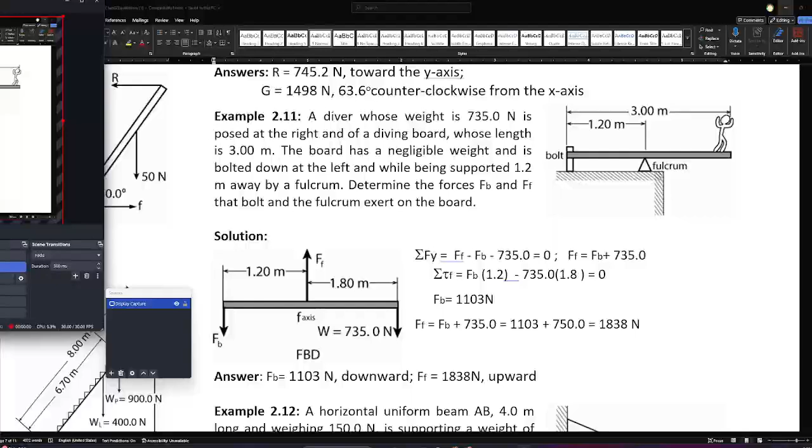A diver whose weight is 735 Newton is poised at the right of a diving board whose length is 3 meters. The board has negligible weight, meaning we don't consider the weight of the board. It is bolted down at the left while being supported 1.2 meters away by a fulcrum. Determine the force FB.

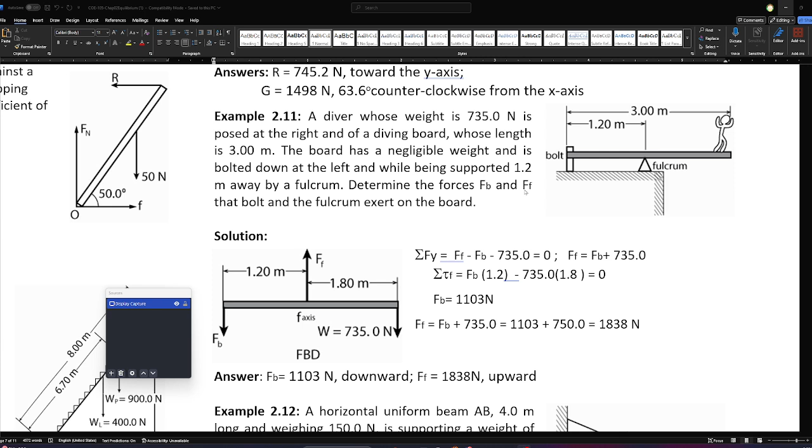This is the force exerted by the bolt. And FF here is not frictional force, but the force of the fulcrum, that the bolt and the fulcrum exert on the board. Let's try solving it in my own way, not the way of the module. Let's try my explanation, obviously.

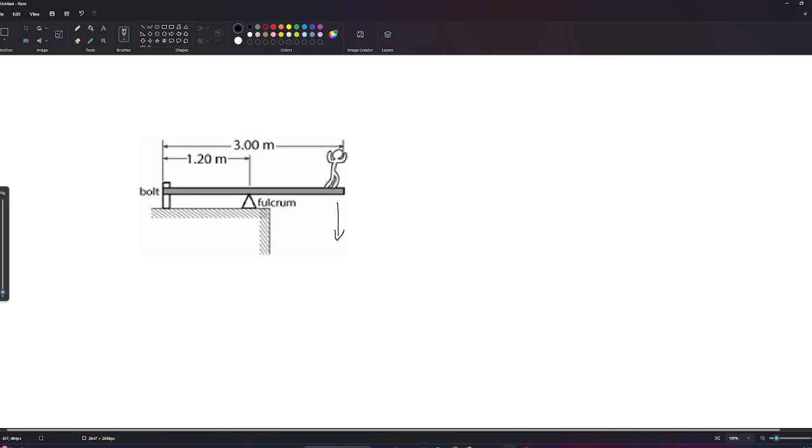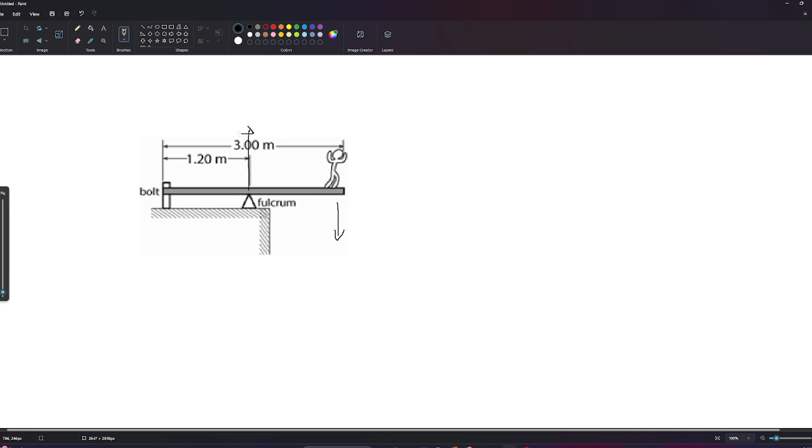The fulcrum now is responsible for the normal force, in which the normal force is the force of the fulcrum. Then the bolt, of course, also carries weight. Let's say this is FB. Now we have two unknowns, FB and FF.

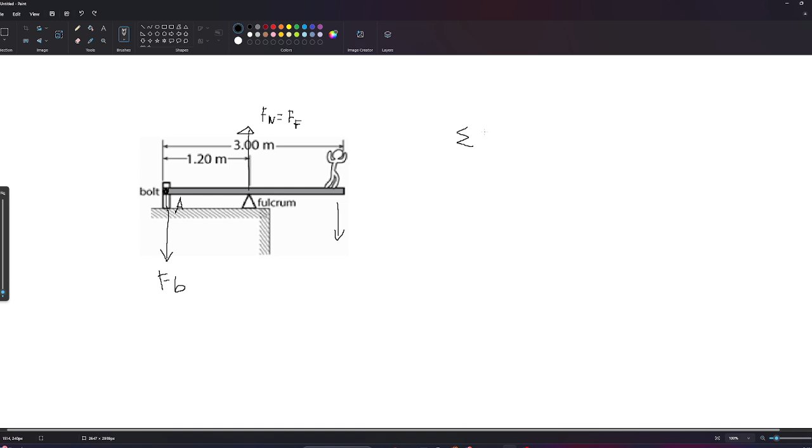So obviously, like last time, I'm telling you, if you are to find the pivot point, if we pivot at least at one unknown, we can get rid of that unknown so it cancels out. What am I saying? Let's say this point is point A. So the summation of torque

Pardon me for using the mouse, my handwriting is still the same, really ugly. So this torque, the tricky torque, therefore, 0 is equal to F1 times distance 1 plus F2 times distance 2 and so on and so forth, Fn and distance n. Meaning, whether there are 10 million or just 5 active forces, you add them all, the summation of torque at a point equals 0.

Let's try it. 0 is equal to FB multiplied by 0. Why 0? Because at point A, the distance of FB is 0. So therefore, whatever force FB applies, even 1,000,000 Newton, if we multiply it by 0, the result will be 0. So its torque here is 0.

Plus F2 here. What will our F2 be? This is the force of the fulcrum, FF times distance 2. This distance is from this point up until this point, let's say this is in red. This point up to this point. The distance of that, obviously, is 1.2 meters. We'll have here 1.2 meters.

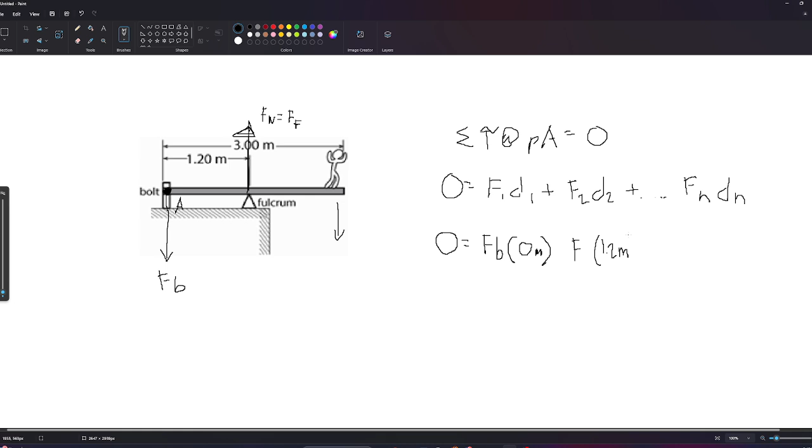But wait, what is its sign? Is it positive or negative? If we notice, if I were to pivot here at the bolt, point A, following this value, this is the 1.2 meters. If I follow the force due to the fulcrum, what will be the rotation? That will be counterclockwise. When counterclockwise, that is positive. Right? So therefore, we will have here a positive value for F. Okay, hopefully that's clear.

Next, we have the force applied by the diver. Plus F3, was the weight of the person given? That is 735 Newton. So we will have here 735 Newton multiplied by the distance. What is the distance from the bolt? From this point up to this one, that is 3 meters, as stated. So therefore, it is 3 meters.

But wait, what is its sign? Positive or negative? Let's follow it. This is the 3 meters. Following it, we see clockwise rotation. So therefore, that is negative, meaning this should be negative in value. Okay, so we will have here, FB cancels out.

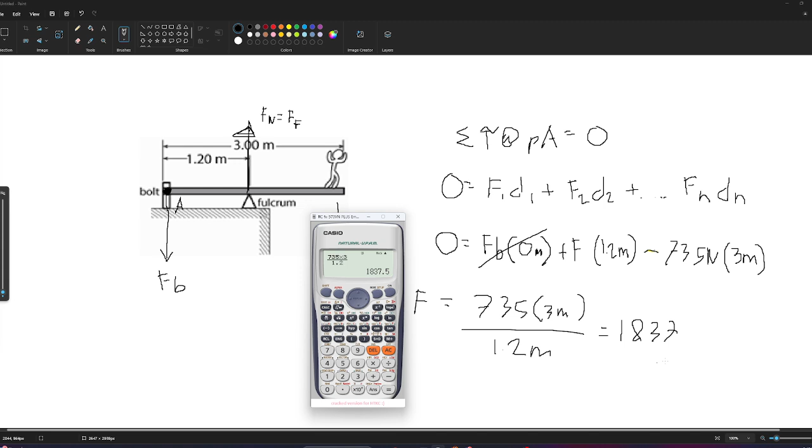If you want an emulator like this, it's free on YouTube, just search Casio 570 emulator. Times 3 over 1.2, the result is 1837.5 Newton. So we have 1837.5 Newton.

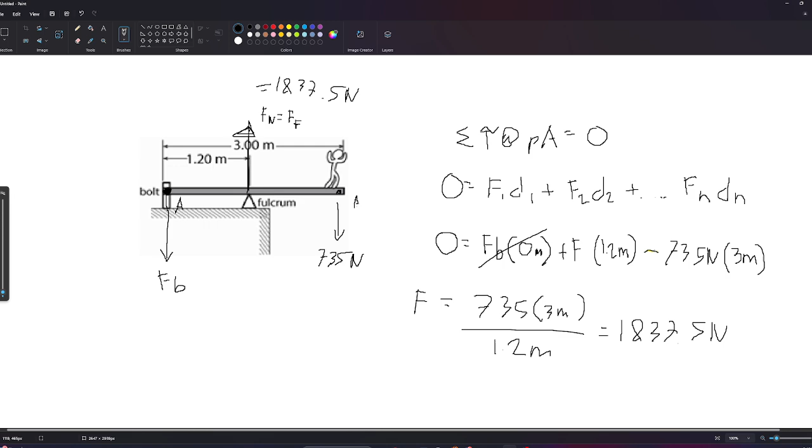Okay, next, for FB. To get FB, we can also take torque at point B. If we take torque there, we just move down here. Here I'll take torque at point B. The summation of torque at point B must again equal 0. So we will have 0 equals this 735... the 0 cancels out. So this is what I'll consider next.

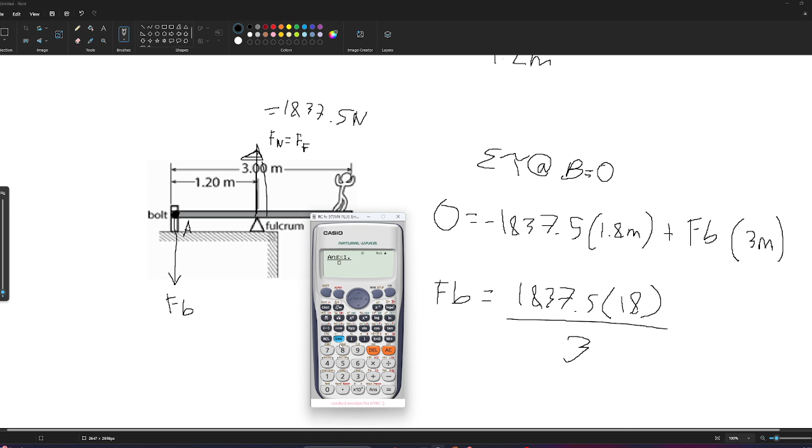So, therefore, magkakaroon tayo ng FB is equals to 1837.5 multiplied by 1.8 divide by 3. So, that is 1837, ito yung kanina, times 1.8 divide by 3. So, therefore, we'll have here 1102.5 Newton. Okay?

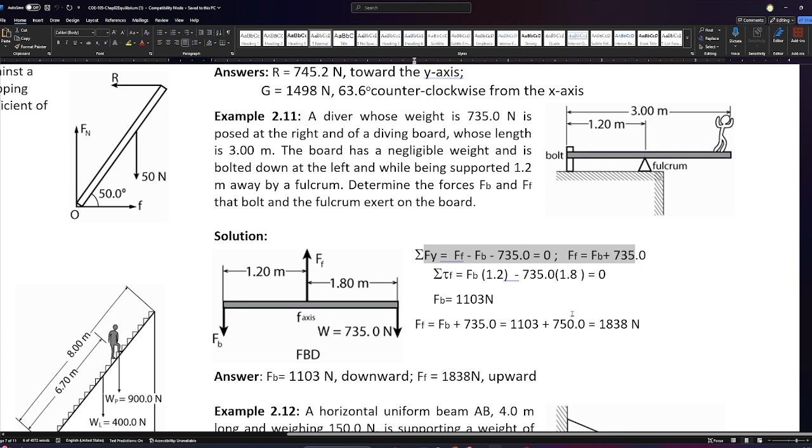A horizontal uniform beam 4 meters long and weighing 150 Newton is supporting a weight of 250 Newton as shown. So, first, what is the tension in the rod T? Ano daw yung tension dito sa rod? Yung puwersa dito sa rod na ito. Compression of the beam. Ito yung compression ng beam nandito. And the hinge reaction RH, RHX and RHY.

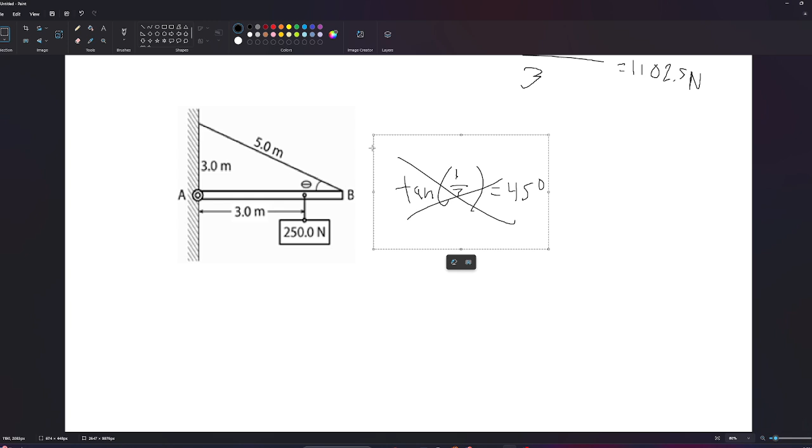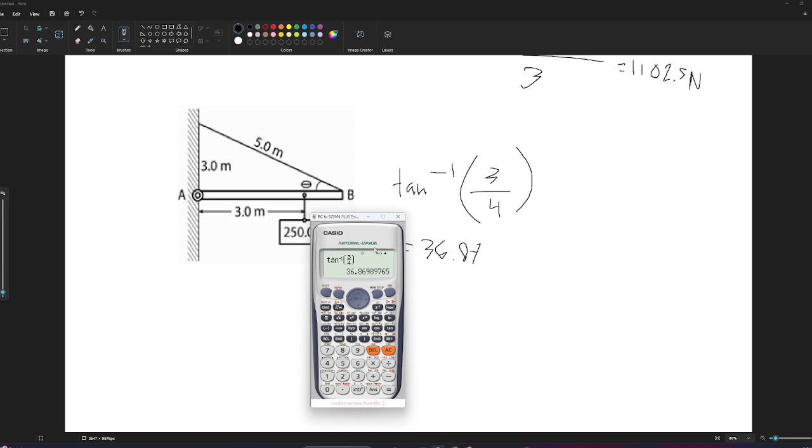So, therefore, para makuha yung angle na to, this angle, that will be inverse tangent of opposite over adjacent. Opposite na 3, adjacent na 4 meters. Ang lalabas dyan, 36.87. Kung hindi kayo naniniwala, pindutin natin sa calculator, inverse tangent of 3/4. Lalabas dyan is 36.87. So, therefore, meron tayong angle of 36.87 dito.

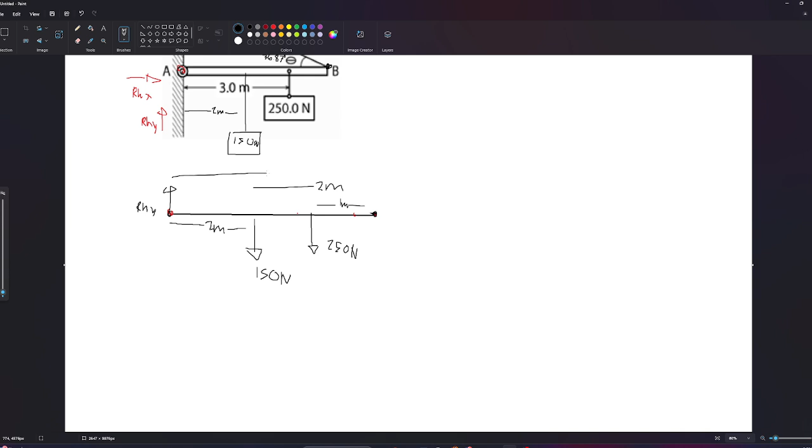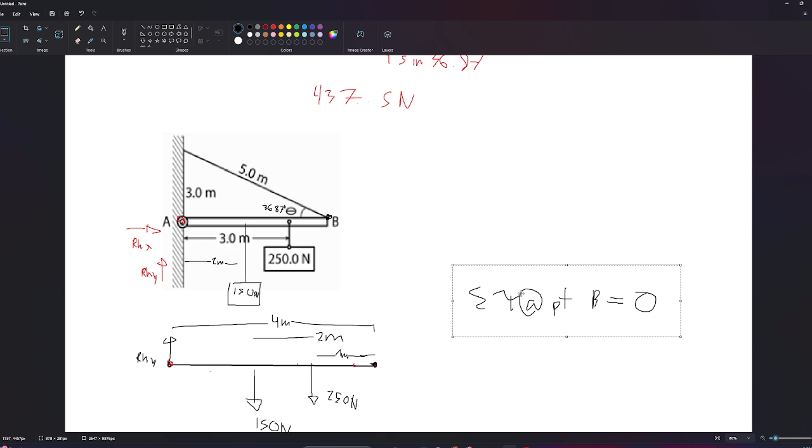Okay, the summation of torque at point B must be equal to 0. You will have here 0 is equals to 250 multiplied by 1 meter. Ang layo nito, 1 meter yan. Ano ba yung sign niya? Positive ba or negative? Paikutin. That is counterclockwise. So, therefore, positive. Next, plus 150 multiplied by 2 meters. Ano ba yung sign niya? Paikutin ulit. Sundan si 150. That is counterclockwise pa rin. That is positive, mga idol.

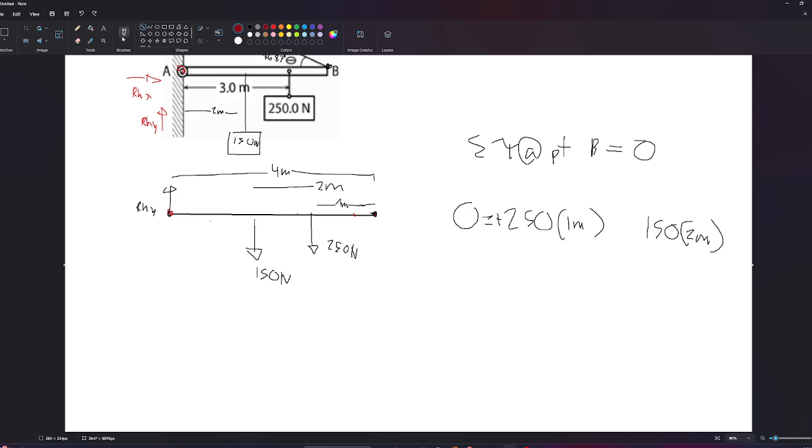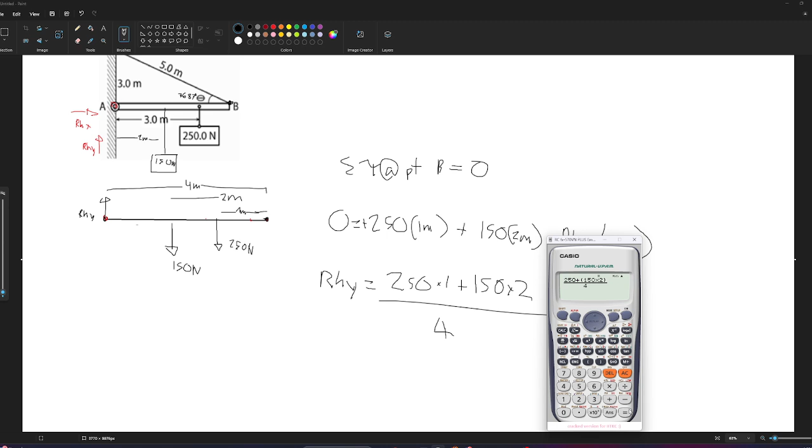Lastly, we have here yung RHY. From this point, 4 meters. Pag pinaikot ko, that is clockwise. So, therefore, negative. Negative RHY multiplied by 4 meters. So, we have here RHY is equals to 250 multiplied by 1 plus 150 multiplied by 2, divided by 4. Lalabas si RHY na 137.5. Okay?

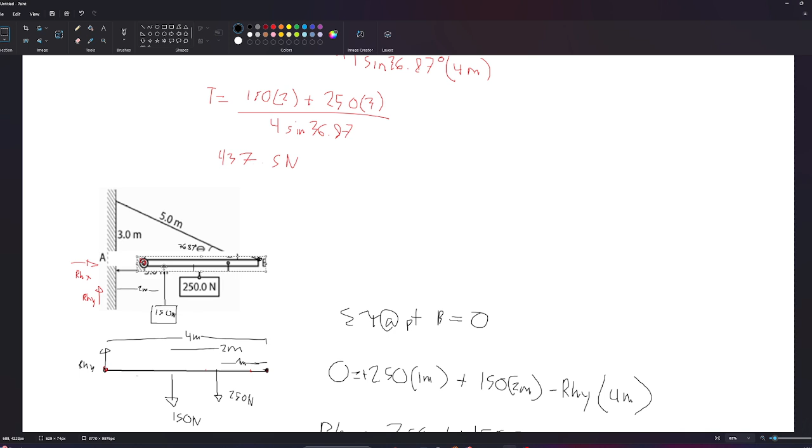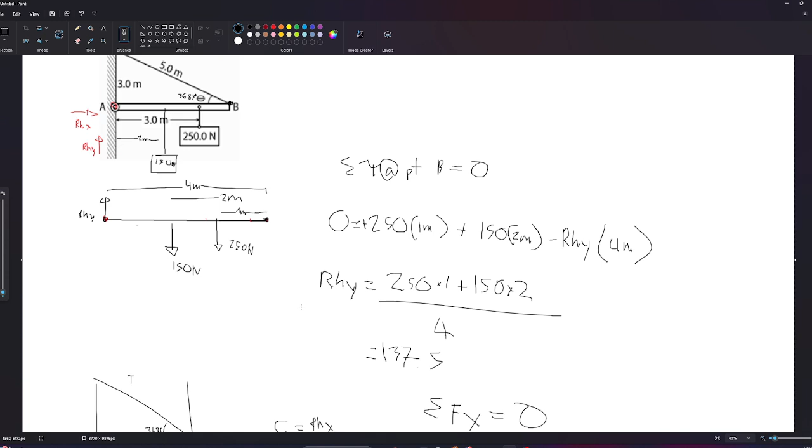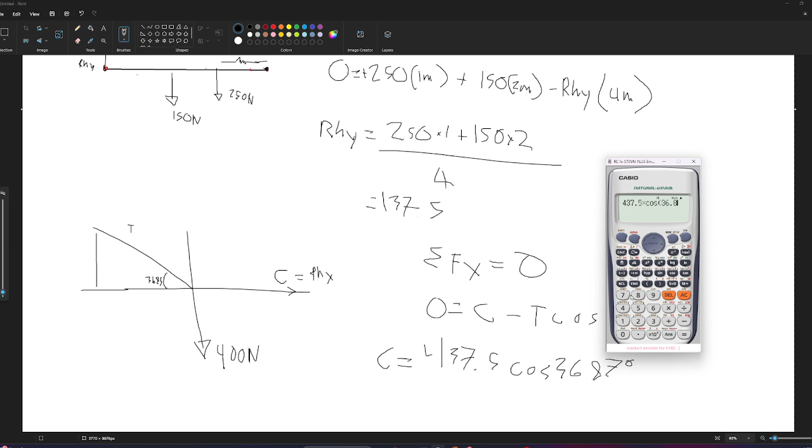Now, ang kailangan lang naman natin is X component. The summation of forces acting on the X must be equal to 0. So, 0 is equals to positive C minus T cosine of 36.87. So, therefore, C is equals to T cosine of 36.87 degrees. Ano ba yung nakuha nating T value? That is 437.5. So, 437.5 multiplied by cosine of 36.87 degrees. Lalabas is almost equal to 350 Newton. Okay? Mapansin nyo, same yan.